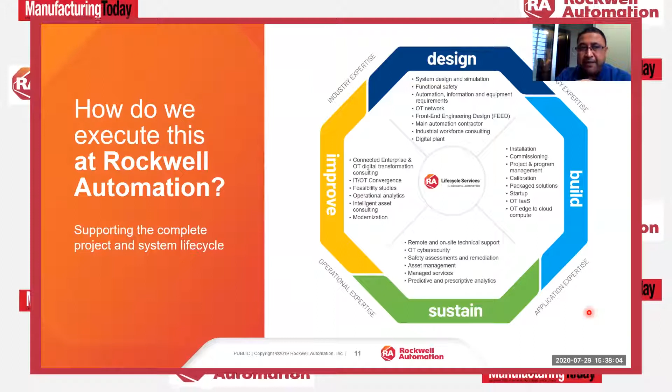So I think that was the end of my session. And as Dilip also mentioned, we follow design, build, sustain, and improve. Using this framework, we try to execute our projects.

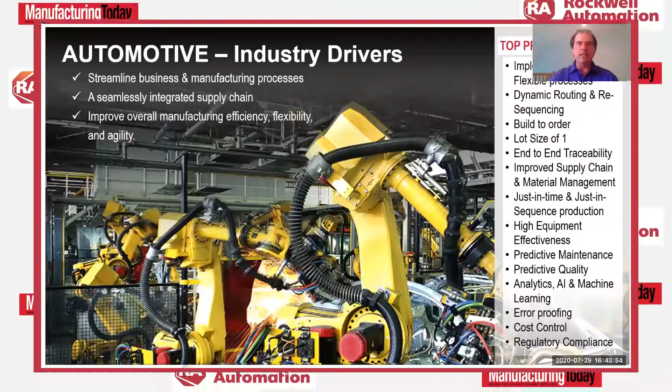So we agree. The whole idea about streamlining business and manufacturing processes, seamlessly integrating the supply chain, improving overall quality and speed and accuracy when we are able to have that seamless integration, improving overall efficiency, reducing downtime, being able to get my equipment, predict when it's going down, being able to repair it faster or when I have opportunity to repair.

Adjusting my lines to having flexible manufacturing assembly lines that can adjust and adapt to varying schedules and product requirements and changing product requirements or new designs, right? So enabling and having that agility of the entire manufacturing process is exactly what customers are asking for and what the industry is driving towards. So this whole idea of Industry 4.0 in automotive.

One of the panelists said that in the design world, automotive has been there for a decade. It's actually been there longer than that. Automotive led the whole integrated digital design world 25 years ago, right? And started actually even 30 years ago, with it to where it is today. So the industry in the world of manufacturing was led by automotive.

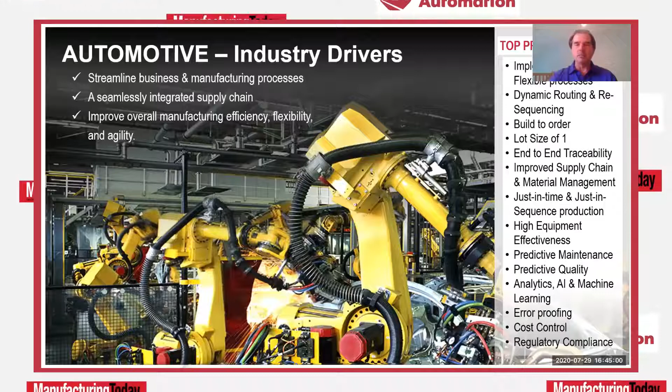But with that said, there's a whole idea about digital transformation that's out there, and I look at this and we say smart manufacturing, right? It's a three-legged stool. It's a design stool leg, a manufacturing, and an enterprise leg, right? So all three have to work together. But I have to say,

people talk about digital transformation, but they still maintain much of the work in each of these areas as silos. They do share information between them for manufacturing, but in general, they still remain in silos. The whole idea of digitalization is about removing paper and bringing data into the world to be able to do some reporting, analytics, get more real-time information. But still, these silos remain.

And the whole idea of design, right, from an engineering bill of material and development, and have to create a manufacturing bill of material that gets transferred into the ERP systems, into the enterprise world, for planning, for supply chain management and scheduling and coordination, right? That remains, and that's where it works today, right?

And then once the enterprise information has that, they share and you integrate the manufacturing bill of material, the schedule, the orders, the inventory, right? All get moved into the manufacturing world, right? And so then they know how to manufacture and when I can manufacture it.

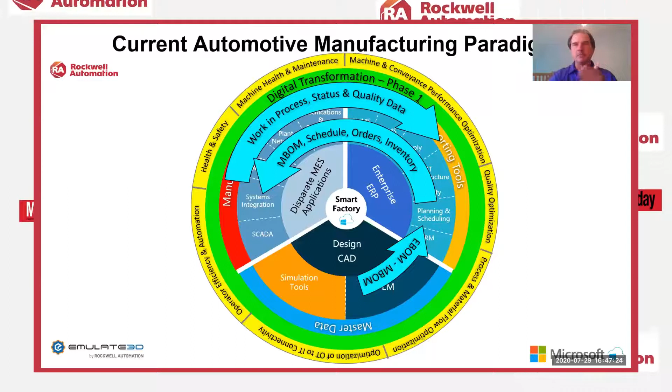Right, and then if you look on the outside of the wheel here, right, is the varying use case areas, right? So the customers are trying to solve into machine health and maintenance, into machine and conveyance performance optimization, quality optimization, process and material flow optimization, IT/OT connectivity improvements, right? How to make that better and simpler.

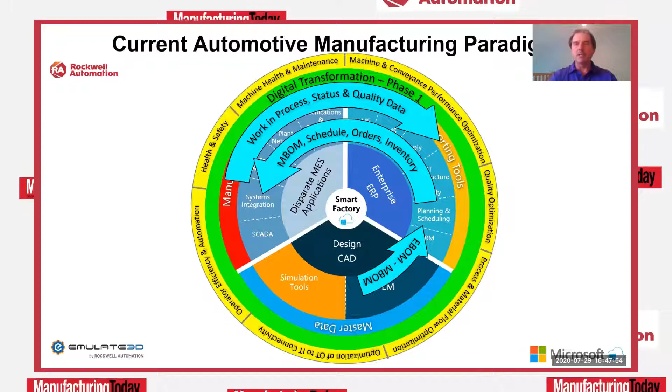Operator efficiency and automation, how to improve what your operators are doing and how they're working and how your people are working on the plant floor. And health and safety, how to improve health and safety without affecting performance, actually improving performance, which has been proven globally, right? So customers are trying to achieve this digital thread, but maintaining still a digital silo in these three different categories.

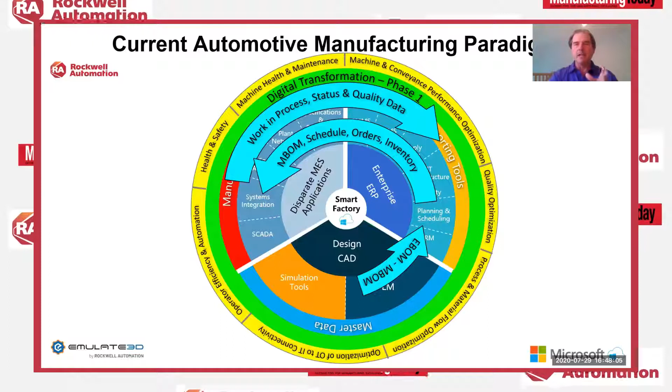So what we as Rockwell would like to say is, okay, let's take what we would call manufacturing 2.0 and 3.0 and move it into 4.0 and even 5.0, and where we're heading. What's the imagination? Where do you see your company on your journey, and what's really holding you back?

I heard comments and there's questions along the way here today about, well, how do I know what's right and where to invest, right? What's the expense? What's the ROI? Where should be my focus? These are questions that all manufacturers, particularly in automotive globally, have been asking for some time, but they take a

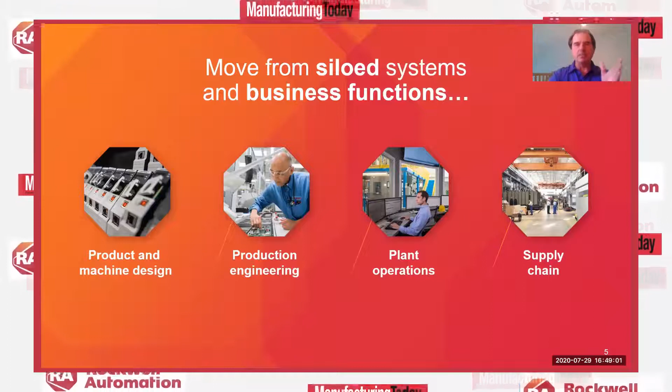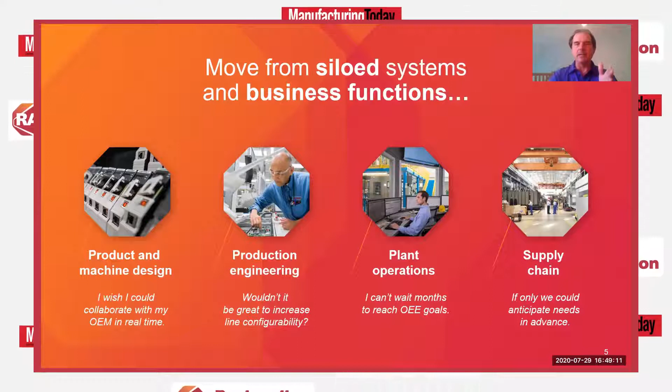different approach, right? So they want to move from the siloed applications of product design, plant operations, supply chain, and enterprise, right? And they want to move these things into real-time analysis to making predictive decisions or prescriptive diagnosis and guidance to the different people with what's happening, right?

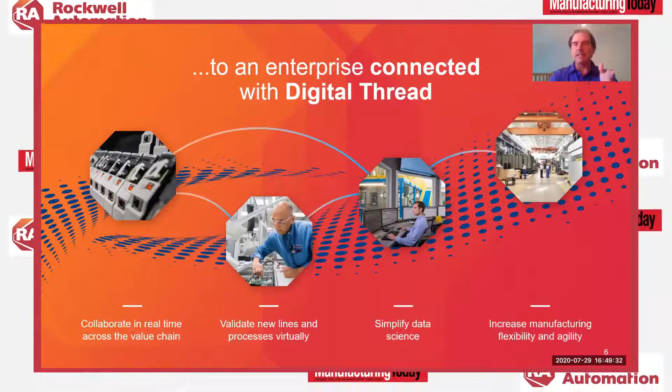So the whole idea is to integrate all of this together, seamlessly, so these can happen quickly. I don't have to wait for a day shift or weekly type report to do hindsight analysis. I want to do upfront real-time analysis and work, and this is happening today globally.

So where that whole original transitional wheel of digital transformation and these different three-legged stools and three areas of design, manufacturing, and enterprise sit - the new digital tools out there are blurring these lines and finally integrating all three areas together. So now design and CAD don't reside on their own, they are completely integrated now into the manufacturing world.

And then you have the enterprise world, and you have IoT platforms that now integrate the entire manufacturing and enterprise data stack. Whether I'm developing analytics and machine learning at an enterprise level, or AI, you need the data to be able to learn and do this. So the IoT platform is what allows these different systems to integrate.

Now you bring in digital twin - everyone talks about digital twin, but most people talk about simulation. There's a difference between simulation and emulation. Emulation is the true, most accurate form of simulation because you're using true manufacturing data versus simulated or developed models. That's a huge difference - being able to use real data, real systems, real code to do these tests, to validate your designs before you make them.

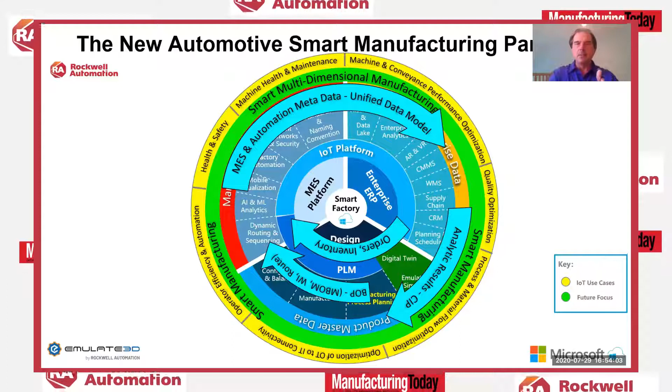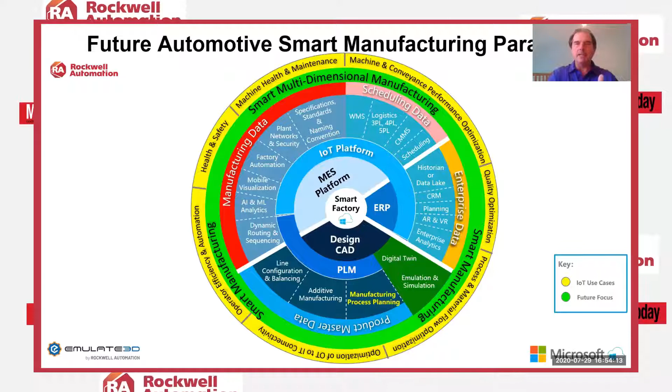To always validate that. But now there's a change also going on into this model. The change is there's new manufacturing concepts and manufacturing assembly concepts that's driving the change and the move of data that was once in the enterprise.

And I'll call this, from Bill Sarver's point of view, scheduling data - I have scheduling, logistics, warehousing data, and the concepts are moving that out of the enterprise and into the manufacturing world. Why? Because they are eliminating warehouses in the plants and facilities, trying to streamline the supply chain directly to the line.

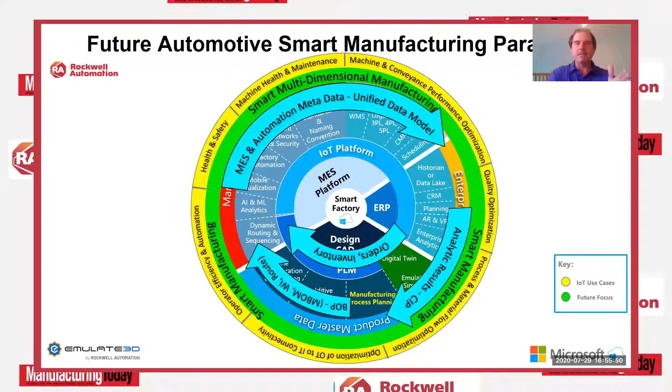So instead of having inventory show up on a dock that gets put away, then selected on a Kanban call out to the line, the whole idea is to understand what's being built very quickly, understand and adjust to a change, or be able to build a new vehicle and have the line or a kitted set of material directly delivered to the line versus a receiving dock somewhere that goes back into warehouse. So to do that dynamic scheduling, logistics planning, and direct line side delivery, this is changing the need for manufacturing to take on even more responsibility. The data flow remains the same as the previous model, but this is a shift in manufacturing concepts going on in this smart multi-dimensional manufacturing, as I call it.

So the whole idea is about flexibility. Today we have a PLC system and coding, and your manufacturing engineering does that. I agree with one of the other panelists that there's a redesign of your organization needed for your people to adopt these concepts. You can't have silos anymore. You have to have an organization that is quick, nimble, and fully cross-functional to adopt these new concepts. So now the whole idea is making process changes, planning my line, and as soon as I make a change, have it adjusted and implemented directly on the plant floor, then be able to emulate and validate that new process change before I actually implement it on the plant floor. And this work is going on today.

We have customers, Rockwell, doing this. From Rockwell, it doesn't make a difference in our world whatever CAD, PLM system, control system, or other systems are out there. We have to be completely agnostic to adapt and support all customers through this process, and we are. So the whole idea is to accelerate the time to value and the time to quality.

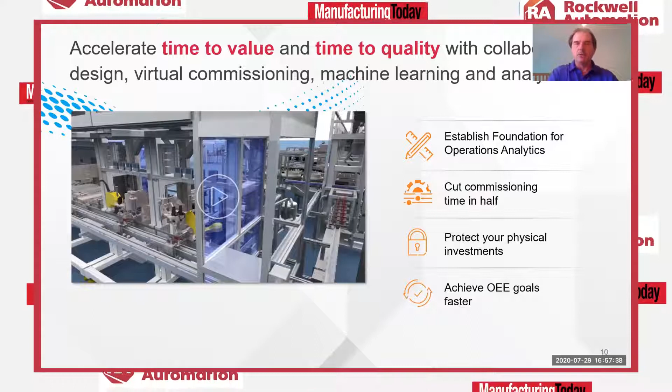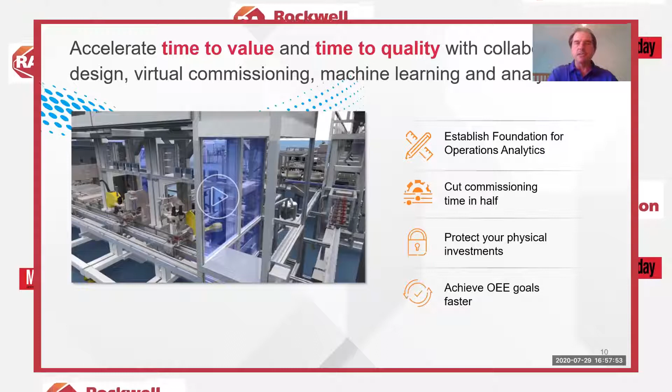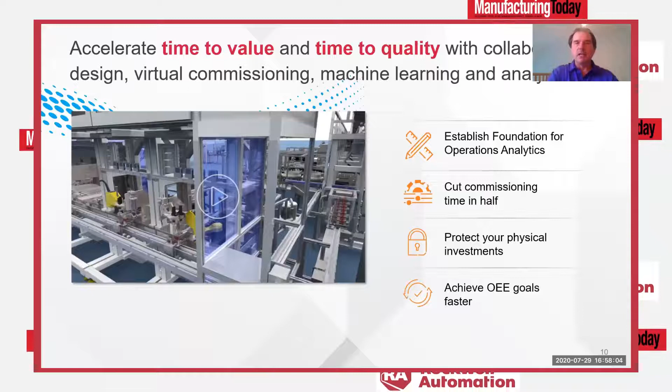So people ask the question, well, where's my ROI? You don't work on any of these analytics cases and Industry 4.0 concepts without a business value to it. The successful people in the industry doing this are the ones who have spent the time building the business cases, understanding them, and putting a business value to each use case, then working on the ones with the most value, because they're leveraging the value obtained by the implementation of these, and that is self-funding all of the rest of the work that moves forward as time comes.

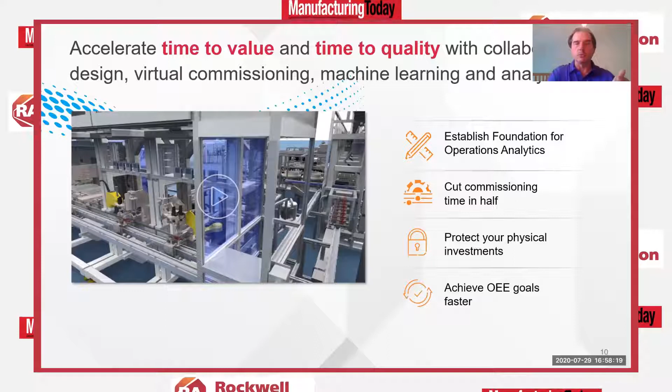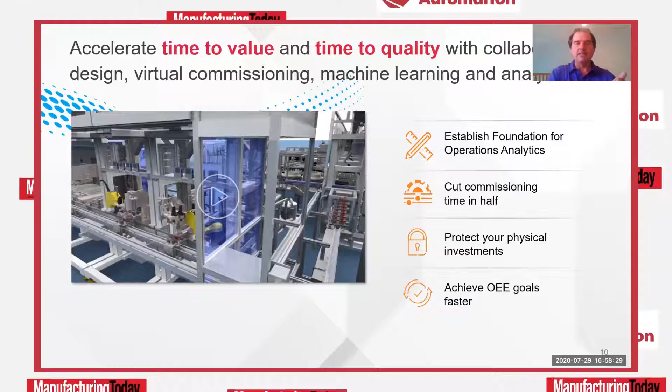So the whole idea of doing this digitally and virtually is about establishing a foundation for operational analytics in the virtual world to do my testing and line reconfiguration up front, to cut my commissioning time in half, to protect all of my existing investments out there, to bring everything into the fold, as other people had concerns about earlier in this discussion, and to actually improve my efficiency.

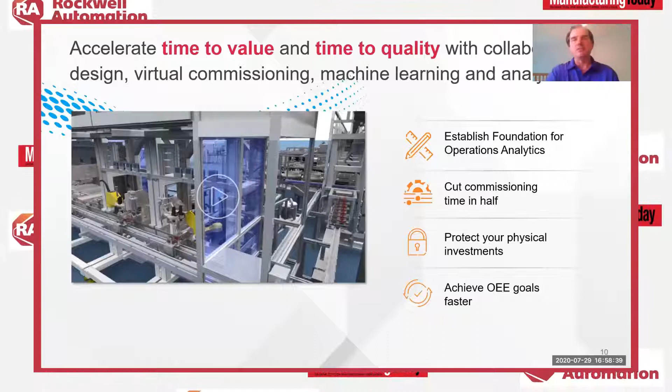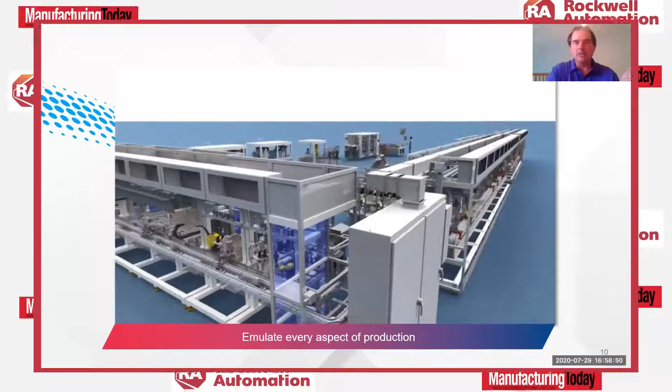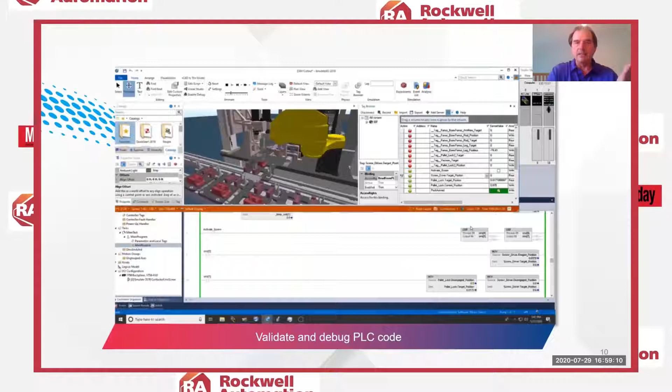So this is all Rockwell tools doing this. Again, we don't own a CAD or PLM solution, so our solutions work with any CAD and PLM system, but we integrate it to be able to do this virtually and to do my testing and validation virtually. This is Rockwell's own contactor assembly line that was validated and put together virtually to build all different types of contactors ourselves. Now we're doing this with our automotive customers as well, but we also use these tools virtually to validate the process to make sure my process moves are improved.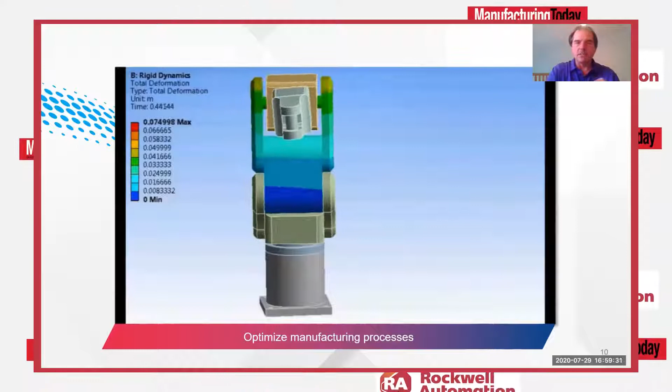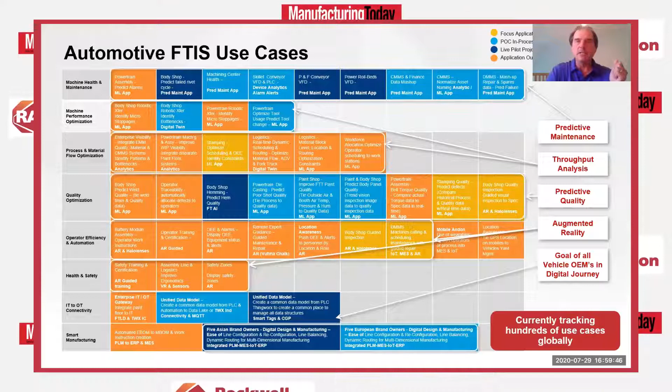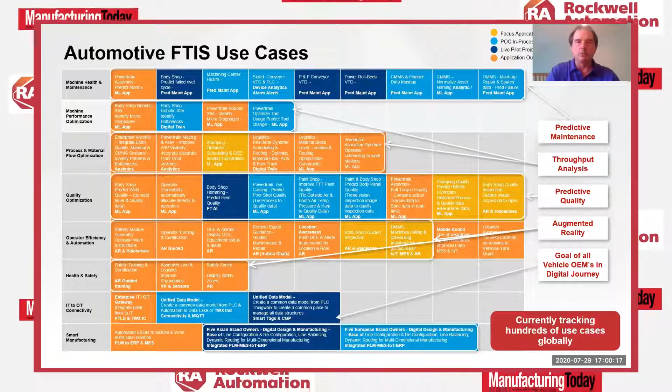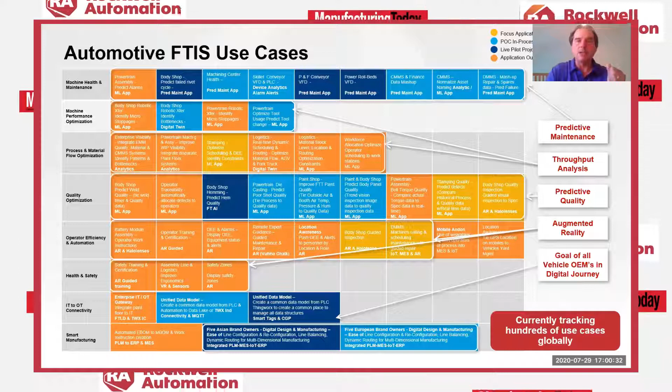Now, some of these concepts are not new to automotive. As I said, they've been doing these for years. But one of the things we found when we did an analysis looking at things globally is that the number one area customers are using IoT, by 50%, is visualization, process visualization. Number two is predictive maintenance applications. But where are they spending their money, where are they placing their bets? They're placing their bets on conveyance, because conveyance has the most loss productive cost to all automotive customers. That's where most customers lose their revenue and profit, downtime caused on any type of conveyance. So the entire industry is focused on trying to figure out where they can develop the best predictive maintenance on all types of conveyor applications, or redesign new systems and processes to eliminate some of these issues.

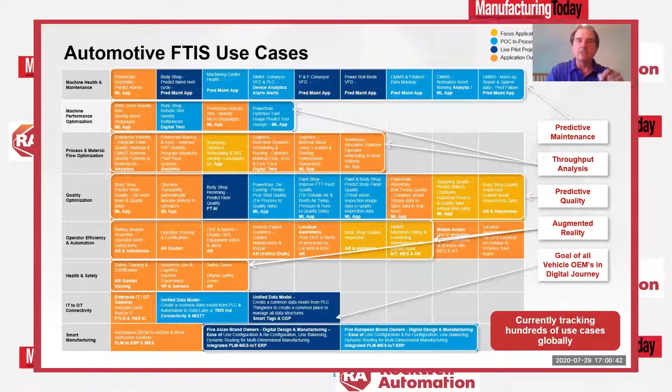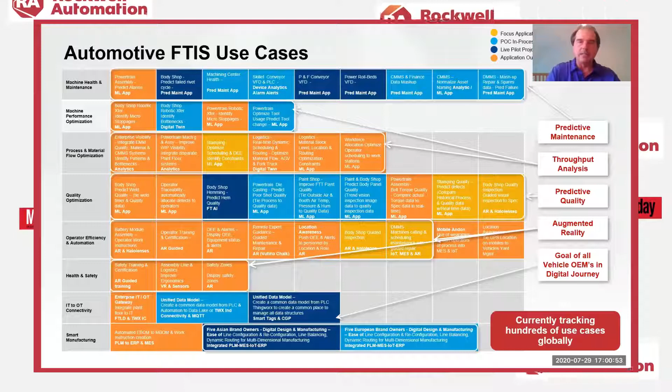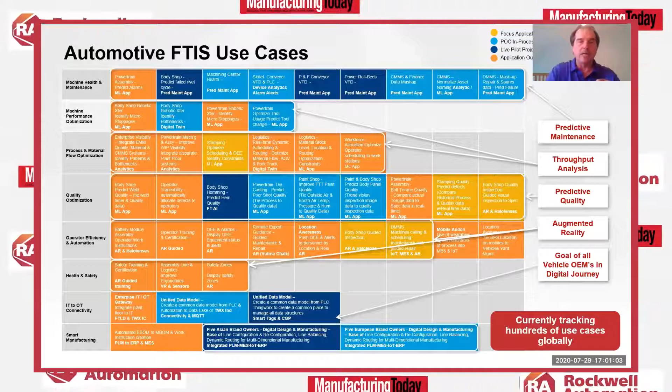The next one is doing throughput analysis. Customers are focused on doing throughput analysis to find the bottlenecks in their manufacturing process as well as the material flow. And then there was a question about quality, and I can tell you that every automotive customer has initiatives around quality to improve quality, because if you can improve the quality first time, you don't have extra cost in your manufacturing process, and you have better results to your end customers.

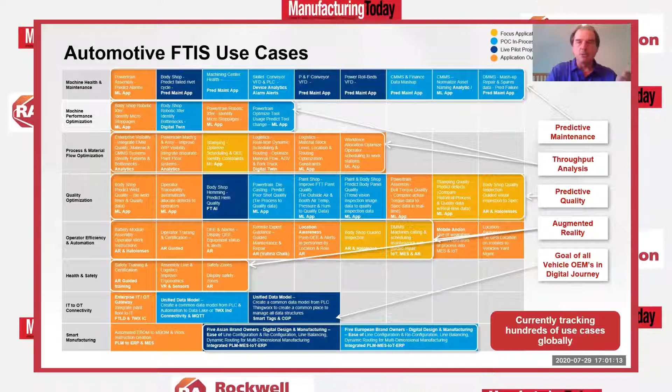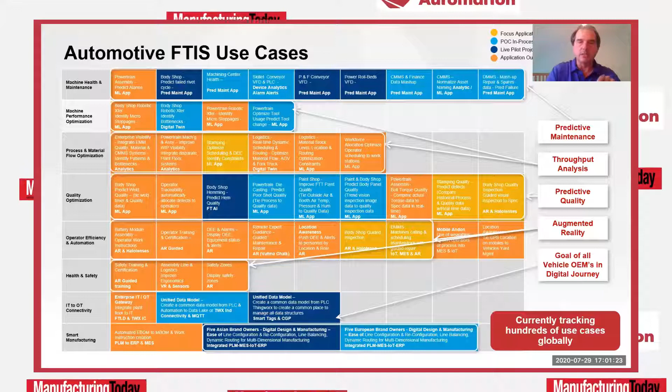Augmented reality is being used in product development as well as to improve MTTRs, as one of the panelists also said. But ultimately, the goal of every automotive customer is to have this complete digital thread throughout their entire organization, and they're taking all of these steps to get there.

So you may not know that Rockwell is a complete end-to-end supplier now of both services, tools, and experience, to be able to do this. And we help customers going through a digital thread value workshop to help them create their digital thread roadmap and to really do an assessment on the readiness to be able to implement all of the ideas that they're trying to achieve, or understand and help them develop their vision.

So we have this ability, and most of our customers don't realize all of what Rockwell has done in the last 5 years, being able to do this and provide this ability to customers.

So from the product side, the partnerships and the acquisitions that Rockwell has made into PTC, into the purchase of Emulate 3D, the purchase of ANSYS and their digital modeling technology capability and digital twinning capabilities, the advent of Thin Manager and integration of web-based solutions on the plant floor of multiple legacy systems, to delivering more functionality and capability with the purchase of MES Tech and Maverick, and now Kalypso in the whole consulting and digital optimization side of things, and digital design specialization, and then into the security and the rest of the consulting partnerships that Rockwell's provided.